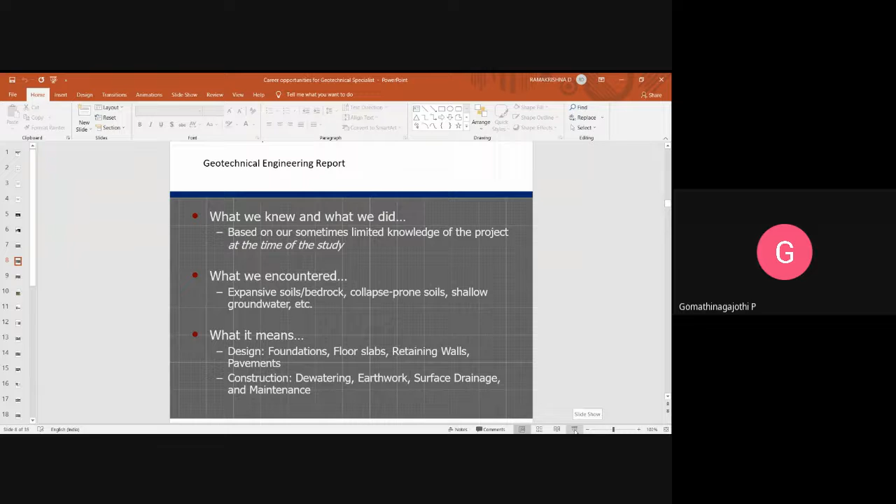Now some data we have collected. Sir, what does it mean? Ramakrishnan sir, sorry to interrupt — please tell me, ma'am, the first slide is still there. The slide is not moving. Yes sir, now it is moving. The full screen mode has some issues. Sir, you can keep two tabs open — one with the meet and the other with the PPT, so the screen is split and you can see other slides while presenting. Should I start from here? No sir, you can just show the slides so students can understand. Okay, and the explanations are very clear, sir. Okay, madam, okay.

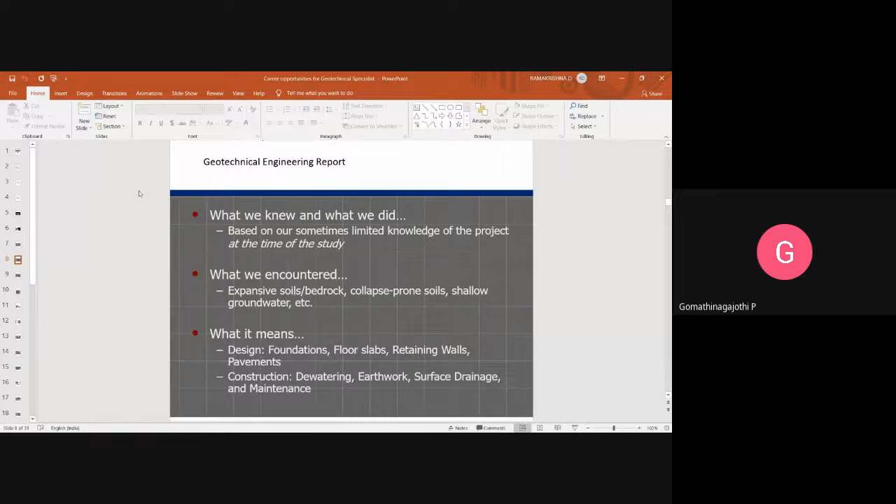Now it is visible, ma'am. So if I go to full screen mode now you can see. Yes, it is the same as before. So, you want me to... No, we can carry out like this only, sir. This only? It's fine, it's fine. Okay, okay.

So this slide we have seen. Now the slide is moving, ma'am, changing. Sir, it is in the second slide now. Yes, this we have already discussed. Third slide, this also we have discussed. Third slide is not visible, sir. Third slide is not visible, huh? Ah, yes, sir.

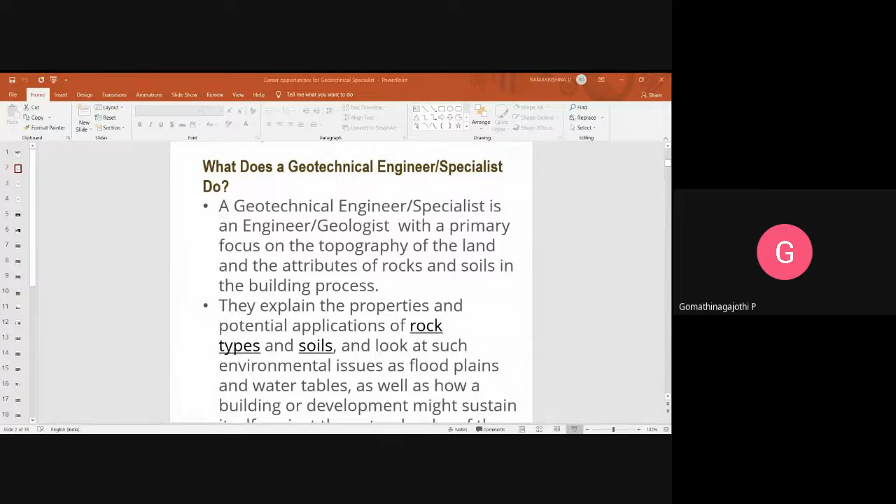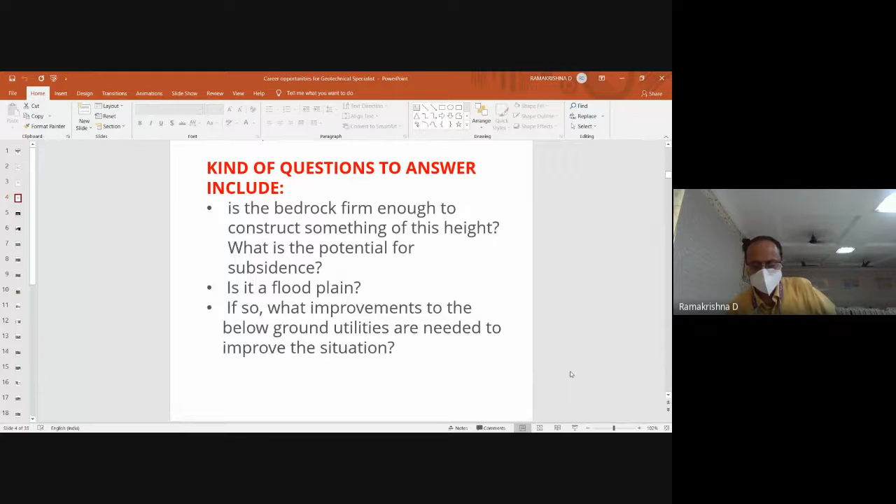Now, ma'am, it is in the fourth slide now. You can see the slide. Yes, sir, I can, you are able to see it. So that means if I go to slide view, you are not able to see? It's not moving at the time. Ah, yes, yes, sir. Maybe. Okay, then this should be fine. Yes, sir, I will show it like this one. Yes, sir, yes, sir. Please.

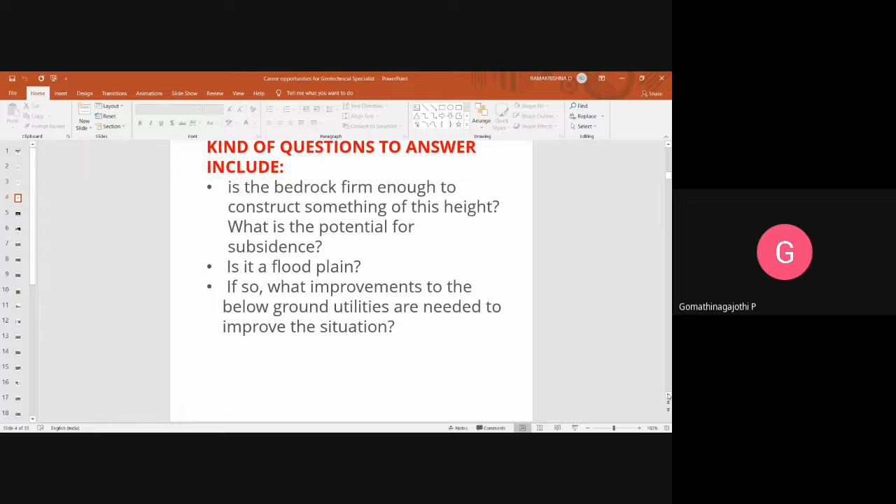So I just showed you this for your information. And these are the four components which are involved in any geotechnical study.

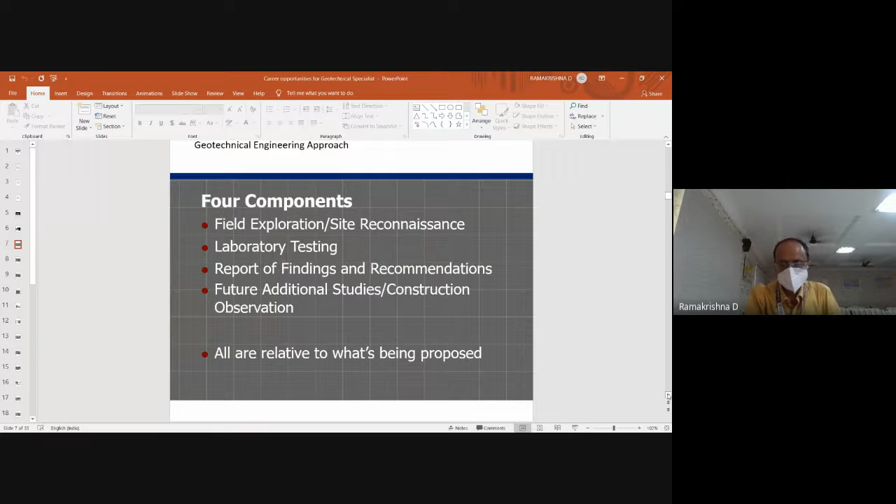So then I was telling you about how to tackle any problem. Once we understand what is the type of soil, what is the type of rock, whether the soil is prone to collapse, what is the depth of the water table - all these aspects - now, how to translate this to the designer. The designer is interested in foundations, floor slabs, retaining walls, pavements. So these are some of the requirements we specifically address as far as geotechnical engineering is concerned.

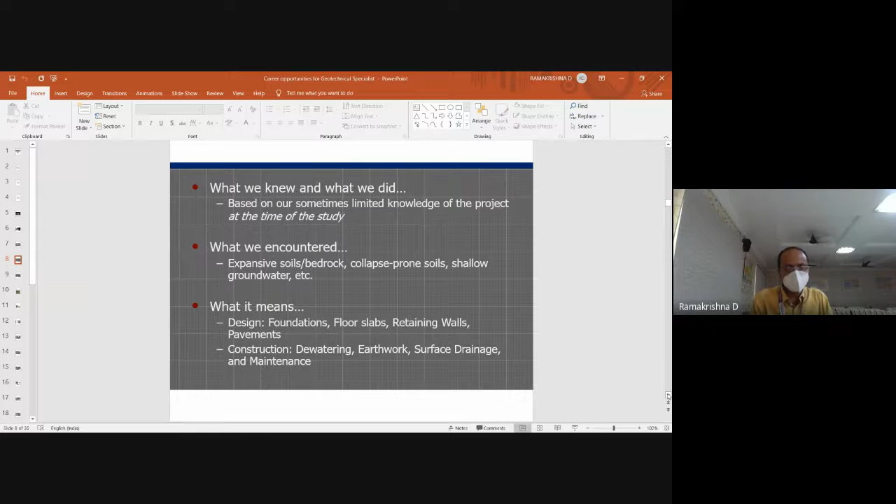Then coming to the construction persons, how our geotechnical knowledge is going to help the construction manager. What should be the extent of dewatering? What is the earthwork involved in carrying out this project? And what is the surface drainage conditions existing in the project area, and what is its implications on the project completion, and what are the maintenance tasks we have to do on a day-to-day basis when we are involved in construction.

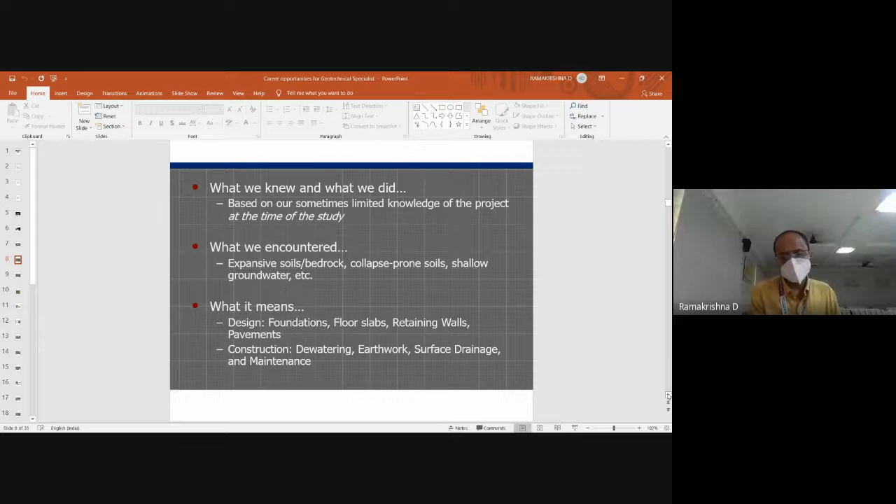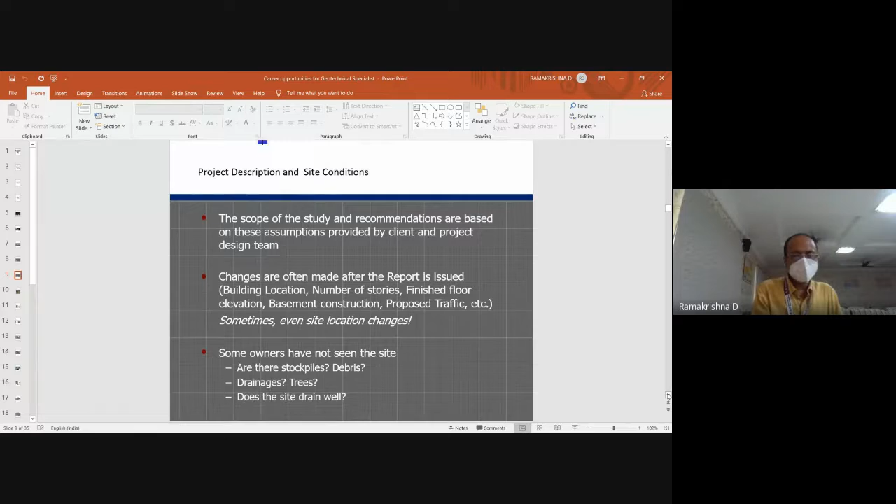Let us see how we go about this briefly. The project description and site conditions, scope of study, and any recommendations based on the assumptions provided by the client as well as the design team. Probably the DPR, the detailed project report, is normally provided to the project manager when he starts any project. So how much detail has he given on the geotechnical aspects in the DPR.

So the next aspect is what are the changes which are often made after the DPR is made. For example, the building location might have changed, number of stories, finished floor elevation, basement construction, proposed traffic, etc. Sometimes even the site location you may have to change. So initially if some site or part of a structure is proposed in a particular place, and due to site constraints, later on you decide it is not possible to complete the project with that same methodology, then you may have to make some change in the design itself.

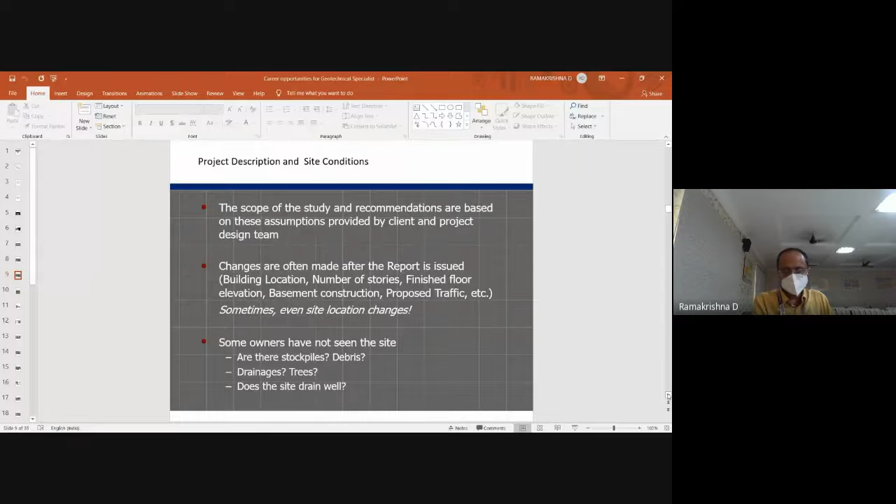Apart from that, some owners may not have seen the site itself. So some aspects are: are there any stockpiles, any debris, any trees, and does the site drain well? All these aspects have to be covered in the geotechnical report.

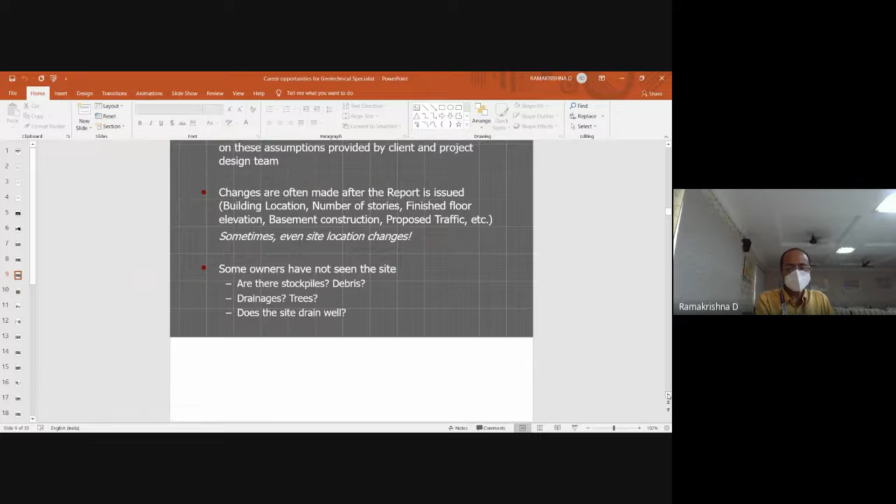Once you complete your desk study, you have to move to the field. You have to go and make a proper study.

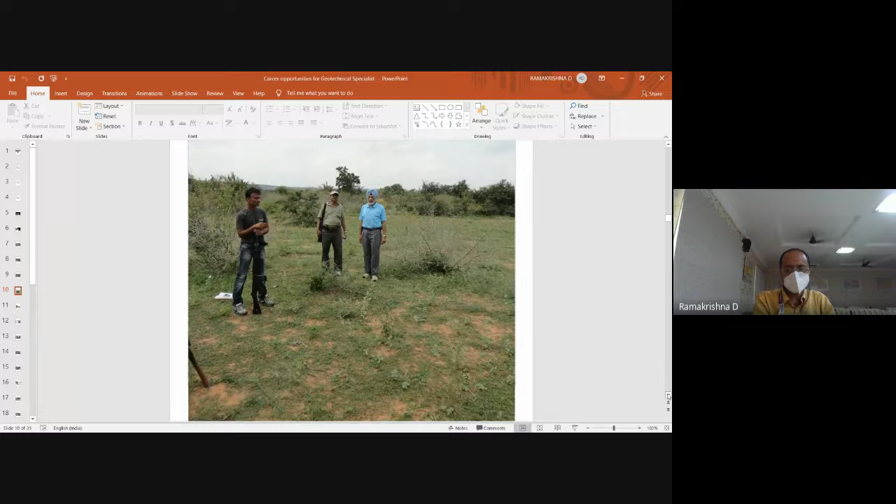I'm emphasizing all this because the job of a geotechnical engineer or geotechnical specialist is not simply desk work, especially when you are involved in project implementation.

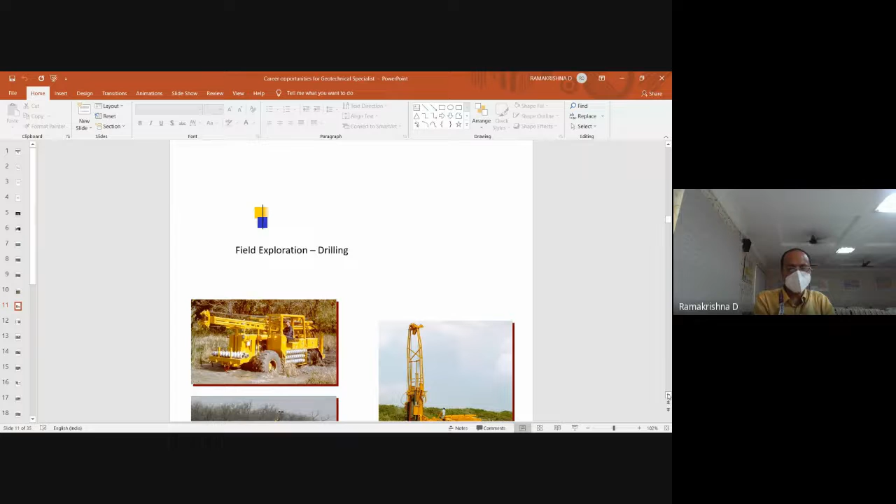After you do the initial reconnaissance, you have to do the field exploration. This may involve drilling, which is a specialized aspect in itself. So those of you who develop your expertise in site exploration - that itself can be a rewarding career for you, because there are multinational companies doing this field exploration, especially in the offshore and marine environment, and the salary also is quite handsome.

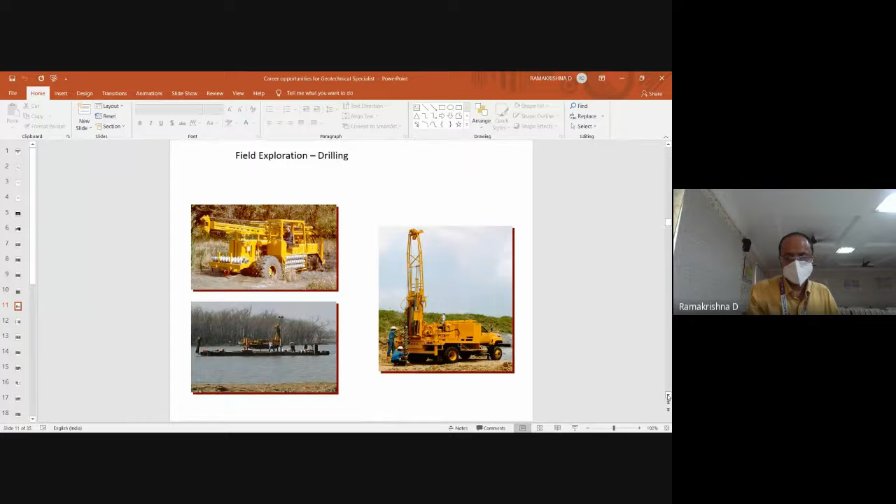So we can see the drilling operation for recovery of samples both in onshore as well as offshore, or in the marine environment.

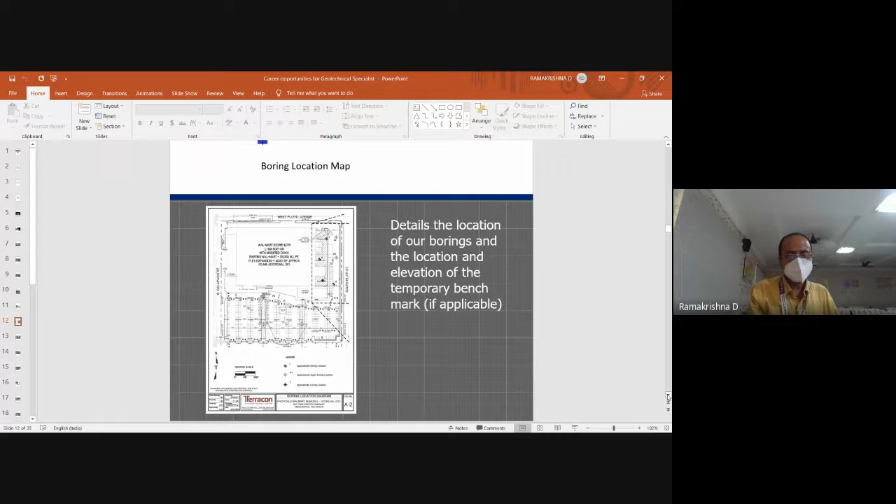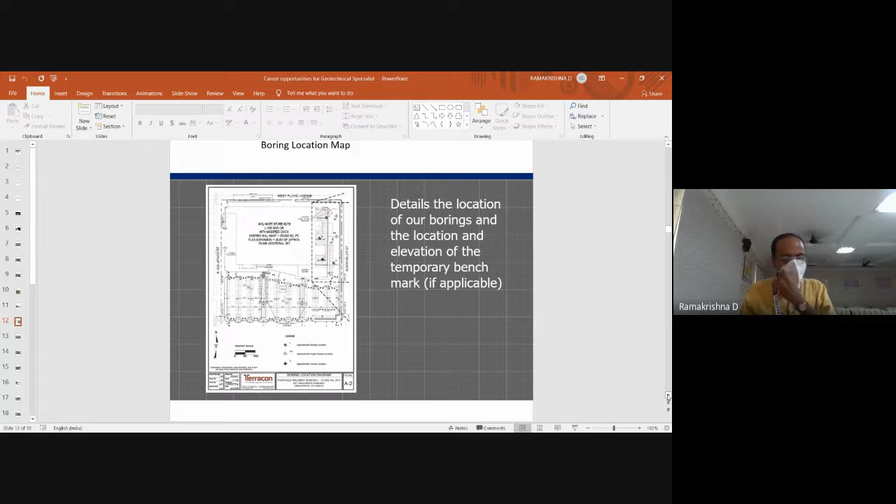Once you decide to start your exploration, you have to prepare a map. In that map you have to show your exploration program: how many boreholes you are planning to make, how many trial pits, what depth you want to carry out your drilling, and to what depth you want the samples to be recovered. This is going to vary depending upon the structure.

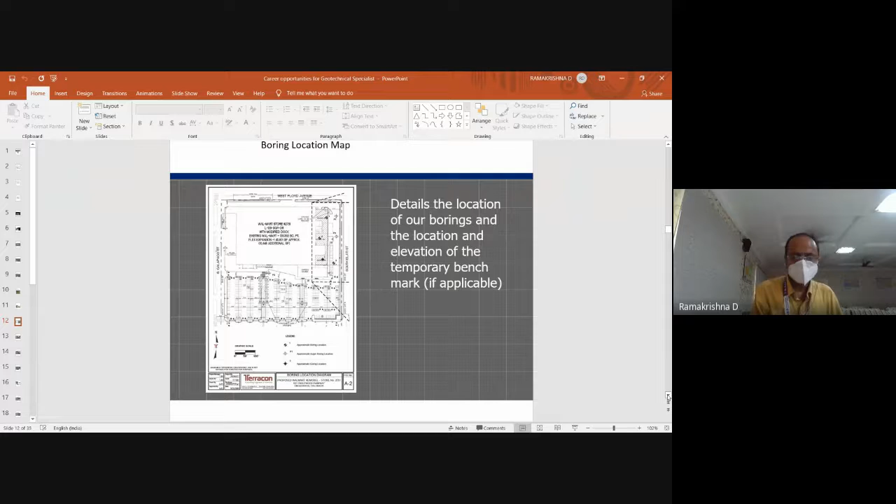We have already discussed this in detail in our soil mechanics and foundation engineering course, so I'm not going to repeat it. This sort of drawing you are supposed to prepare, precisely showing the locations of the boreholes. You should have both northing and easting carefully marked in the map. This drawing the engineer is supposed to prepare, either himself or through a consultant employed for it.

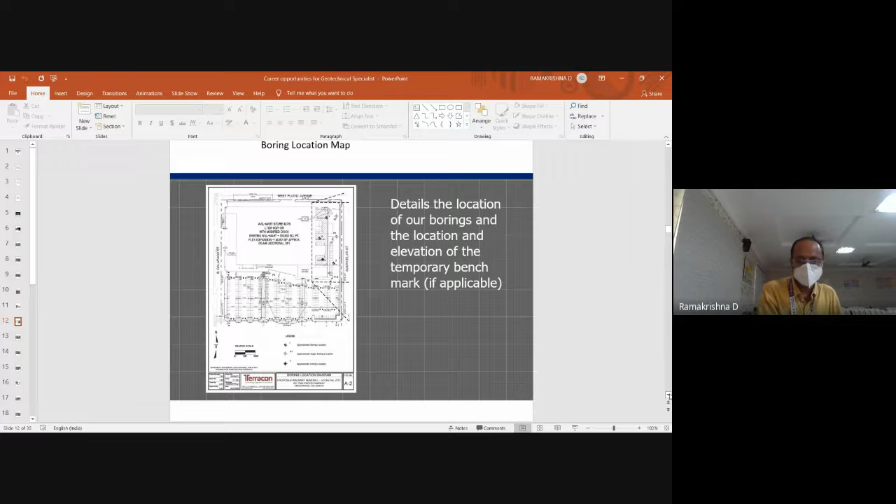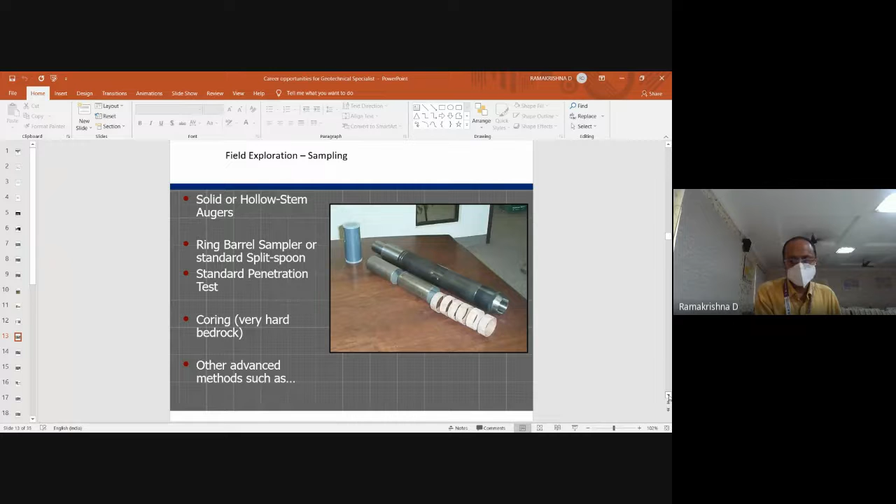Once you have the drawing, you can start your field exploration. There are various types of field sampling - it may be augering, or a split spoon sampler, it may involve standard penetration test, or in case of rock, you may have to do core drilling and take the sample. Apart from that, there are more advanced methods also.

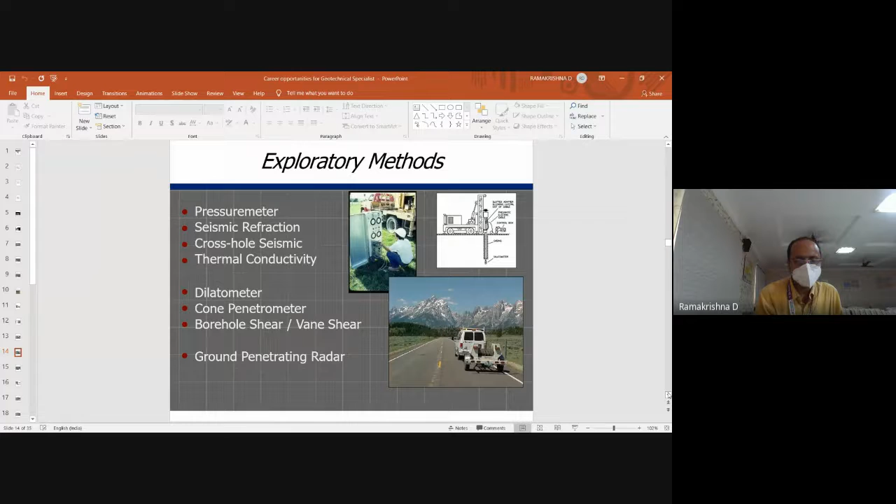The more advanced methods, briefly, I am just mentioning - only where it is required will you be doing it, not in all projects. It could be a pressure meter test, seismic refraction, or cross-hole seismic survey for mapping of the borehole or drill hole, thermal conductivity study, dilatometer test, cone penetrometer test, vane shear test, ground penetrating radar. These are all slightly advanced methods, used only where the requirement is there.

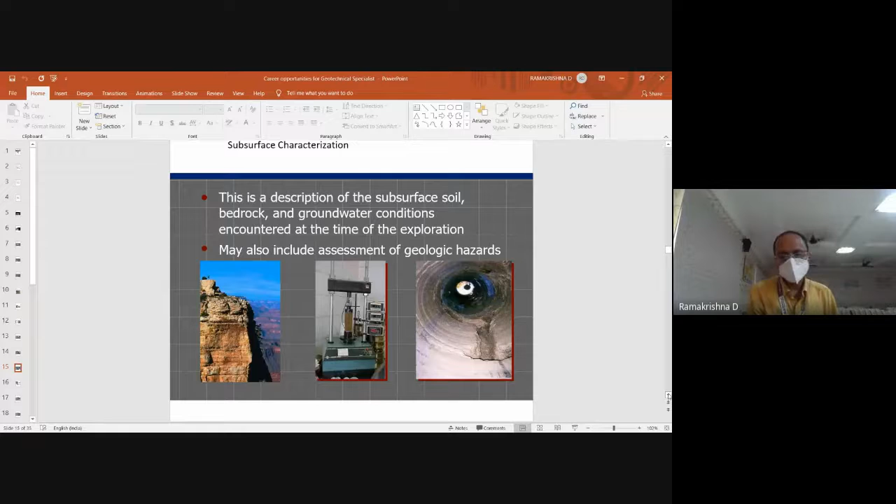Now we have done all this - so what do we want to do? We want to characterize the subsurface, that is our aim. This could be a description of the subsurface soil, bedrock, groundwater conditions encountered at the time of exploration, or may also include assessment of the geological hazards.

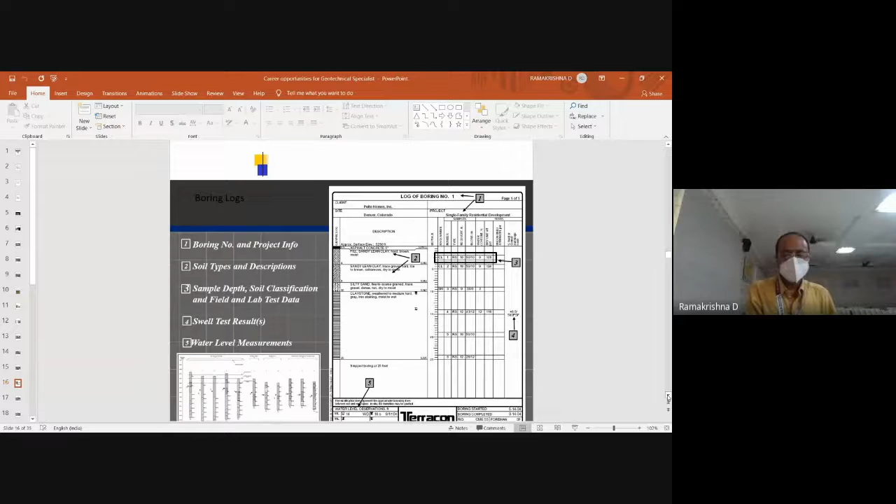Once you complete your boring program, you have to prepare a log like this - this is called a borehole log. This forms the record for the site exploration that you have done. The depth-wise data will all be recorded, with depth mentioned on the left-hand side. Supposing you have drilled to 30-meter depth, all the parameters encountered in the field will be recorded.

In addition, some of the samples may have to be sent to the soil lab for testing, for determining the index properties. That data also has to be incorporated in this geological log. Ultimately, it is this log which is going to be sent to the design engineer - this document itself is going to be self-contained.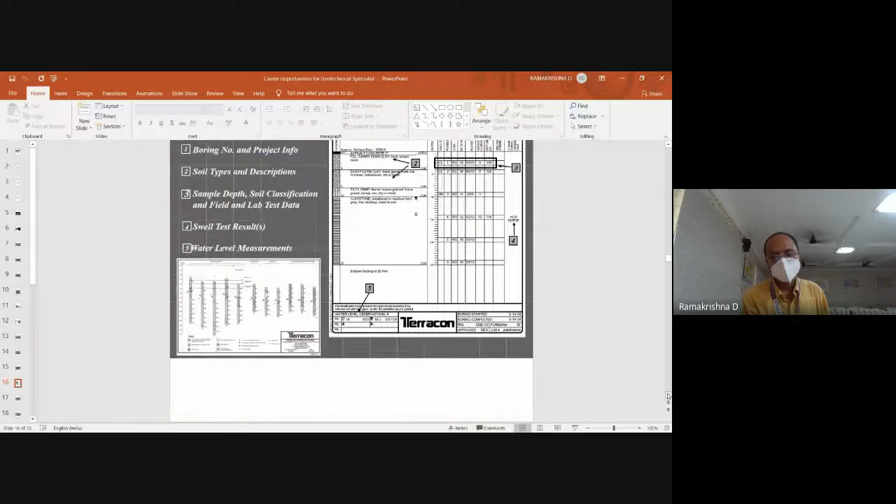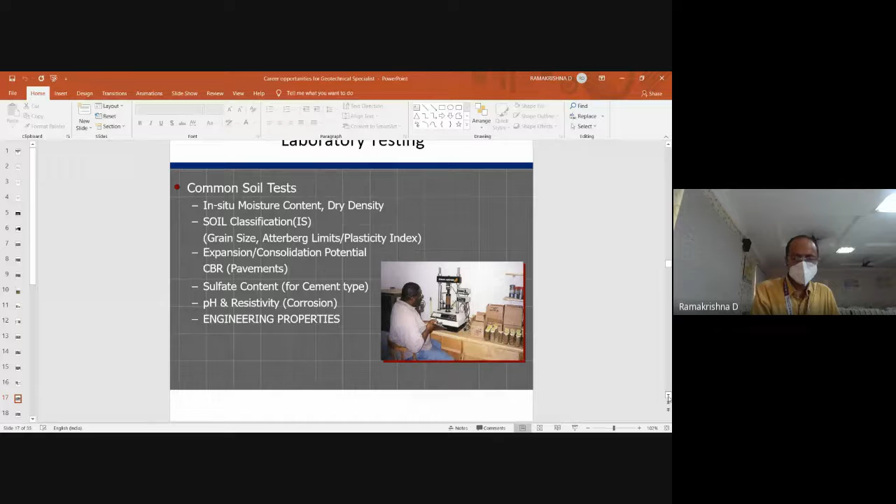Now, lab testing - what are the various lab tests? Most of you know this, we have discussed it in our lab course in soil mechanics. Some of the common soil tests include in-situ moisture content, dry density, soil classification as per Indian standards, expansion potential of the soil, consolidation, CBR value for pavement, sulfate content for cement, pH and resistivity, and engineering properties. All these properties have to be determined from the lab test.

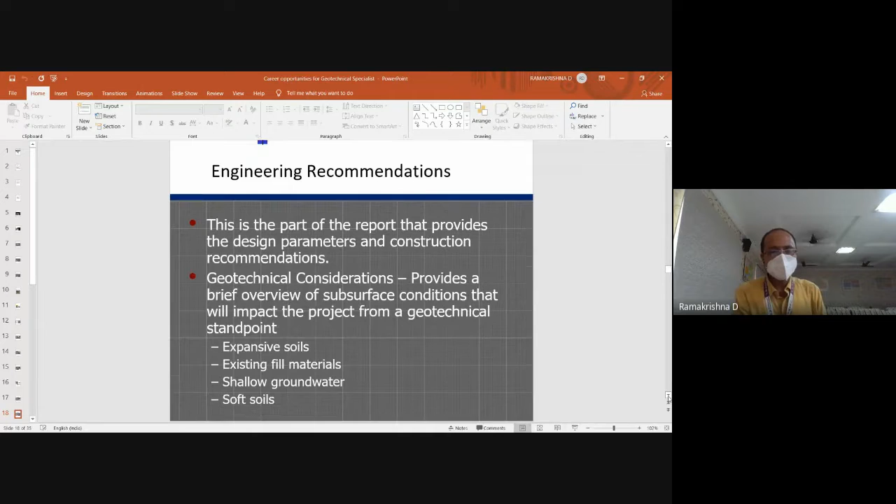Once you have all this data, you're going to make some recommendations to the design engineer. This is one of the very important components of the report that provides the design parameters and construction recommendations. The geotechnical considerations include an overview of the subsurface conditions that will impact the project, which may include expansive soils, existing fill materials, shallow groundwater, and soft soils.

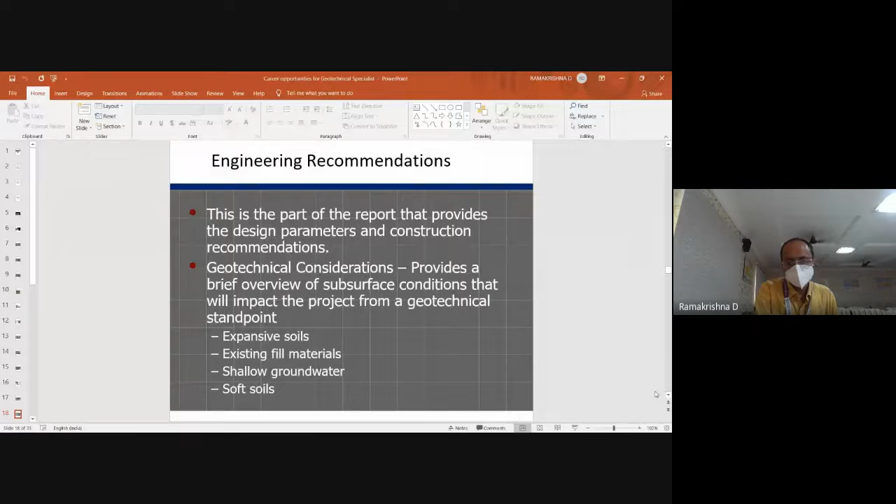Now coming to the foundation engineering aspects - I don't have to repeat this again. You know that for foundation design, the basic engineering property required is the shear strength of the soil, which should have been determined from the lab test, either by direct shear test or triaxial test. Or in some cases you may have to do the test in situ itself, depending on the geostrata - whether it is soil or rock. If it is rock, you may have to do the test at the site itself.

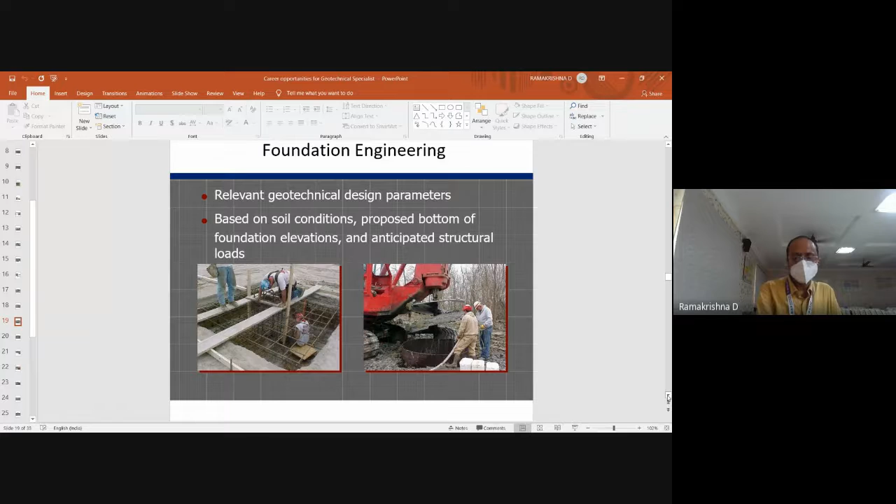So based on the conditions of the geomaterial, we are going to propose what should be the depth of the foundation, what is the settlement, and what could be the anticipated structural loads for safety of the foundation as well as the structure.

Now the other aspects involved in our foundation engineering may include drilled piers or helical piles. We also call the drilled piers caissons. These are used where heavy loads are involved, sometimes on expansive clays. They should resist axial loads, lateral loads, and uplift by socketing into bedrock, and the socket must be below the anticipated level of wetting.

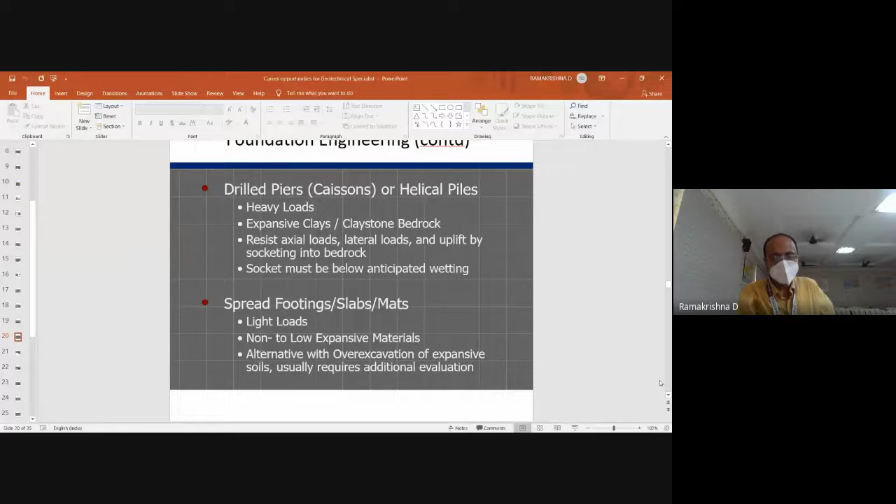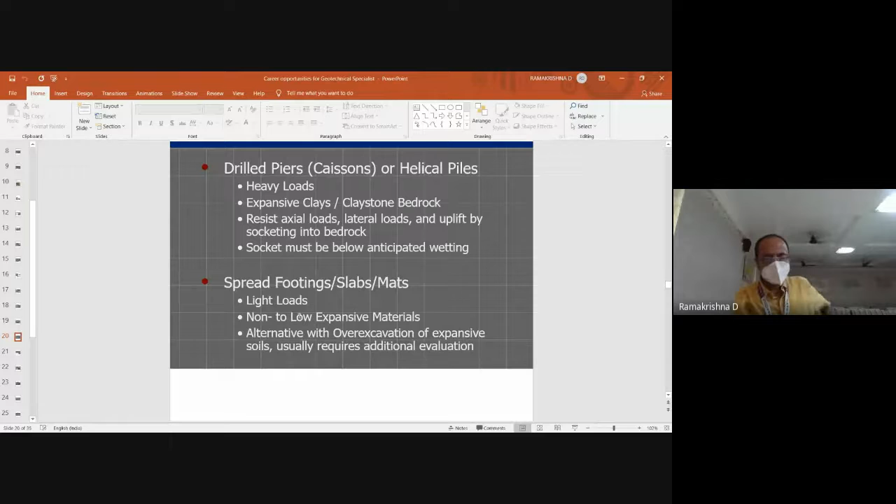Then you may also have spread footings, or a slab or mat, or a raft foundation. These are generally used where loads are light and materials are non- to low-expansive. An alternative with over-excavation of expansive soils usually requires additional evaluation.

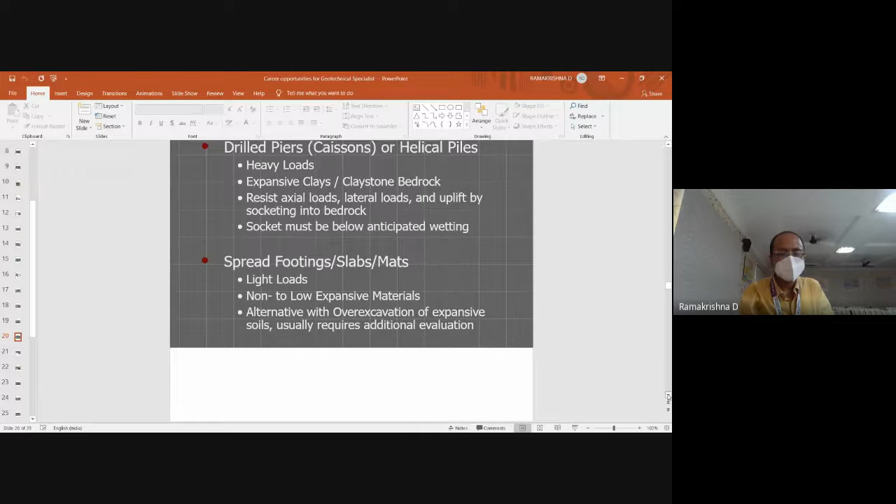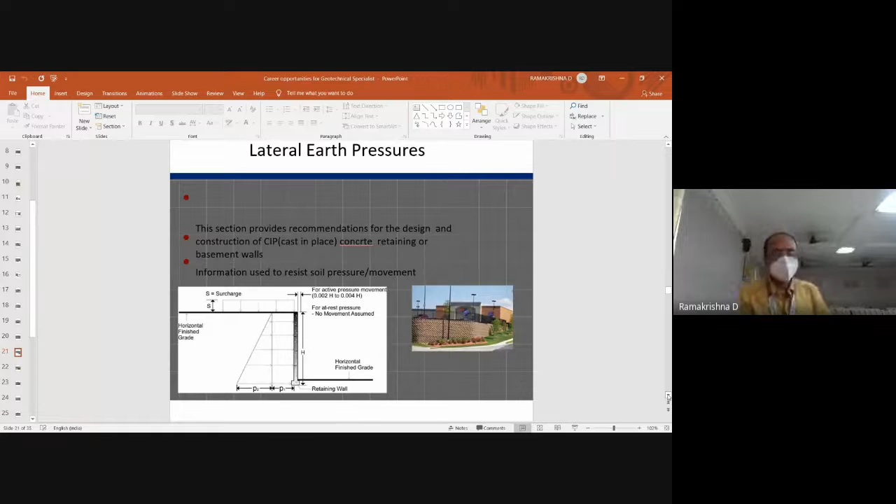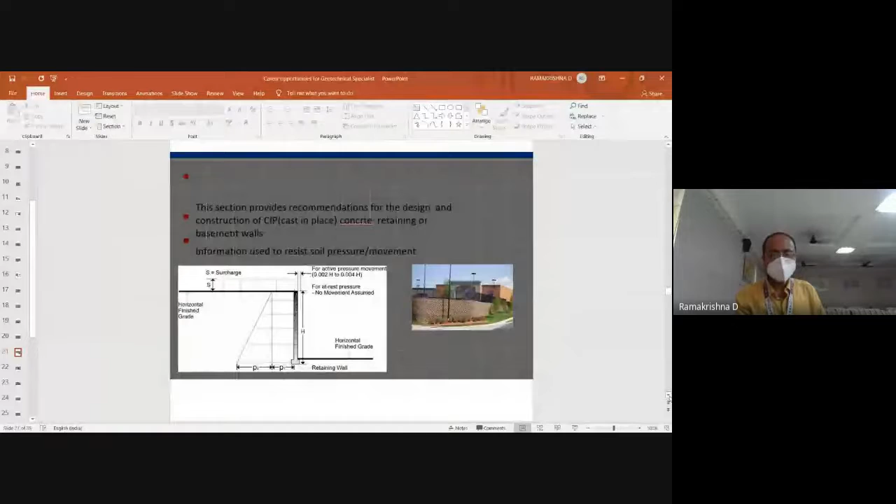The next problem the geotechnical engineer often deals with is lateral earth pressures, especially for retaining walls. For a retaining wall, the lateral earth pressure that will come on it should be determined by the geotechnical engineer. It could be a cast-in-place concrete retaining wall or a precast wall. Whatever the case, the input has to come from the geotechnical engineer on what the lateral earth pressure is and what the factor of safety should be.

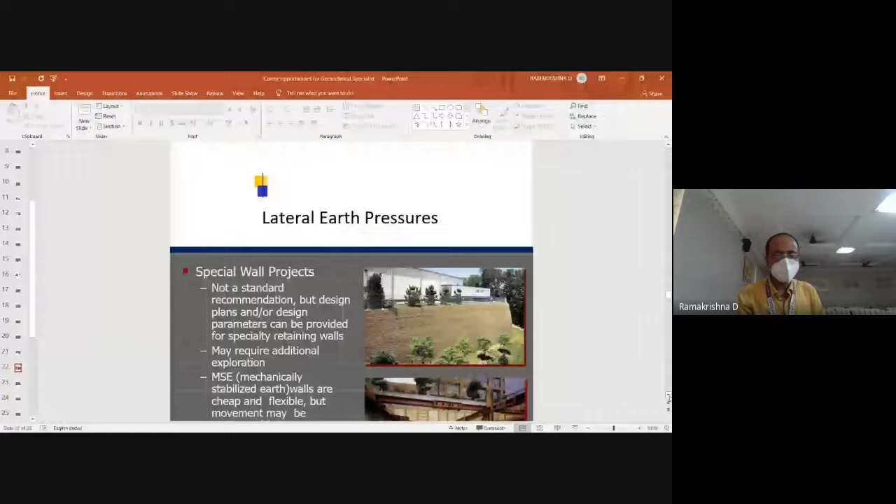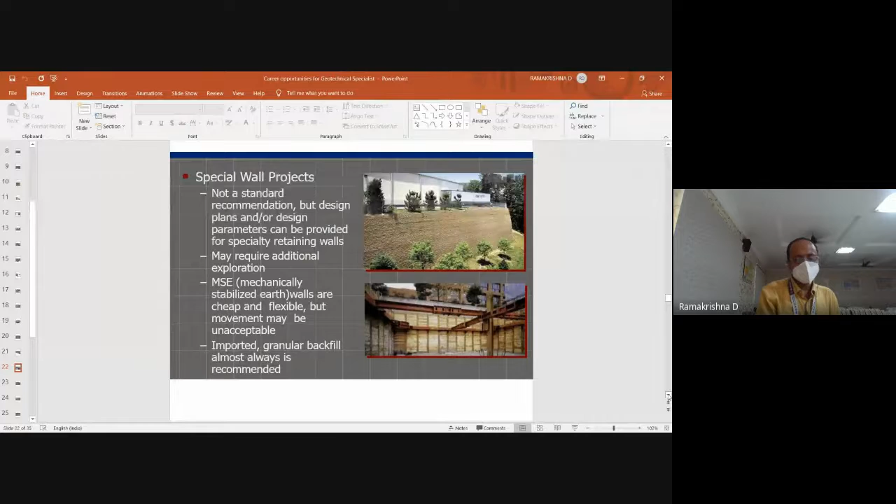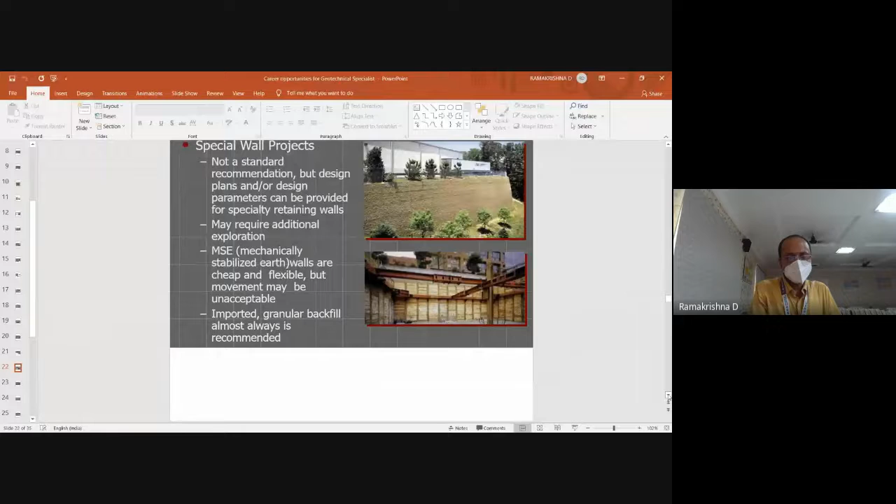You may also have special wall projects, such as a mechanically stabilized earth wall. There are various types of retaining walls, or it could even be a gabion wall, which is sometimes temporary. These retaining walls could be filled with granular backfill, and the backfill recommendation has to be provided.

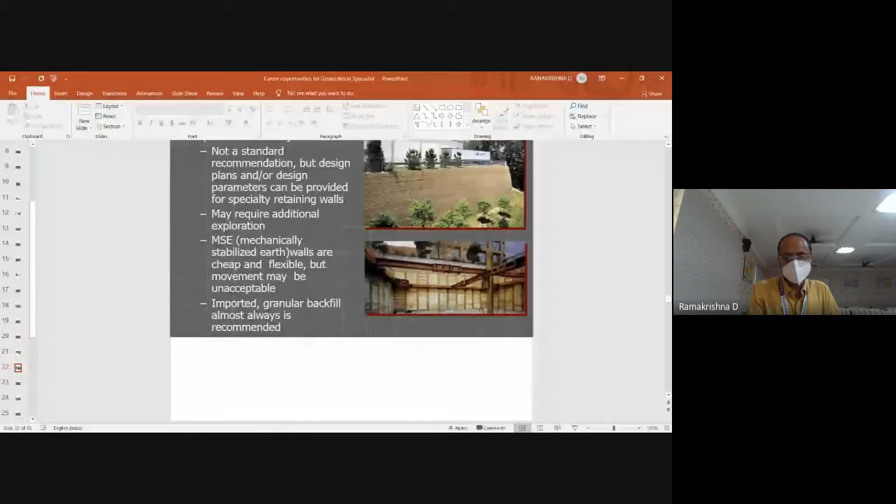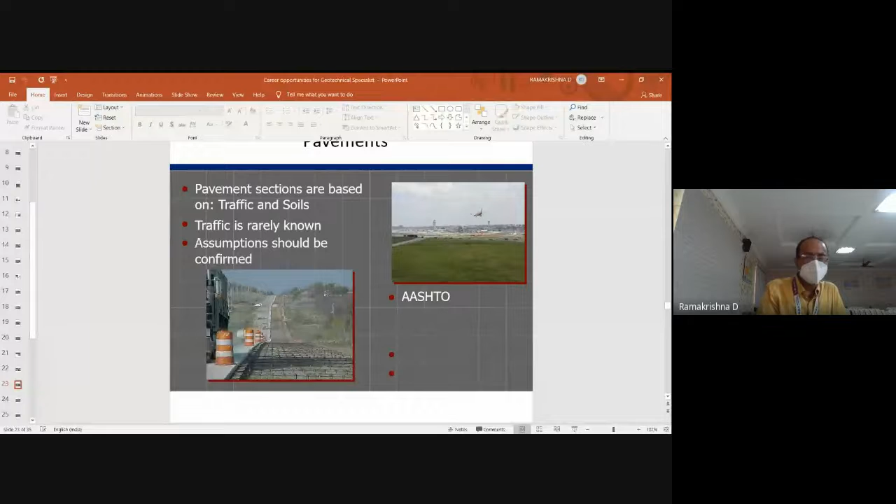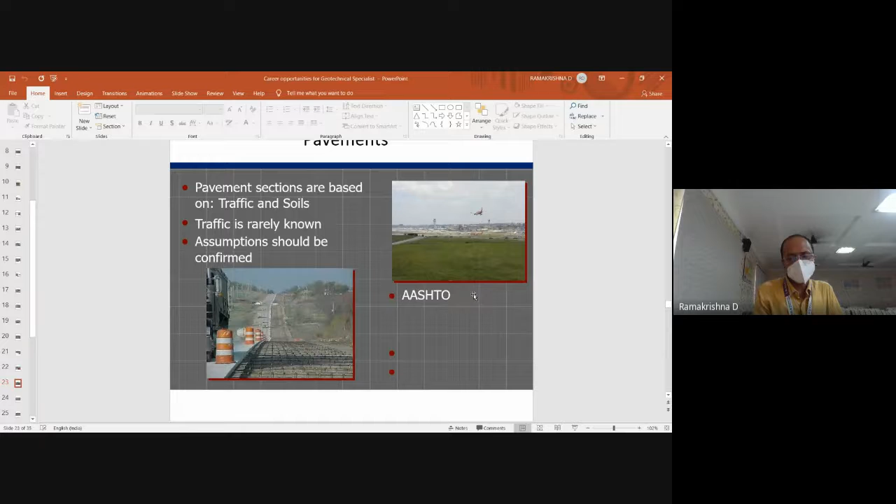The next aspect the geotechnical engineer deals with is pavements. Pavement sections are based on both traffic and soil conditions. Traffic is generally not known at the earlier stage, so assumptions have to be made and then confirmed later. For this, we generally make use of the AASHTO classification of soils, the American standard.

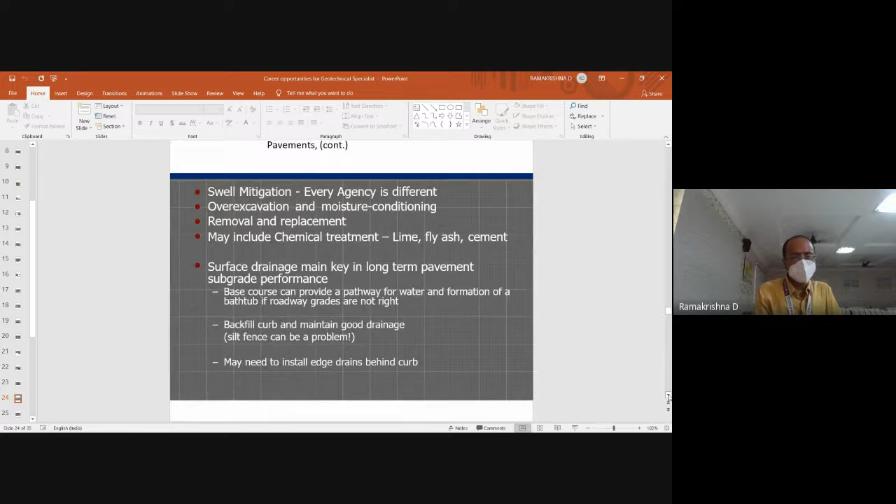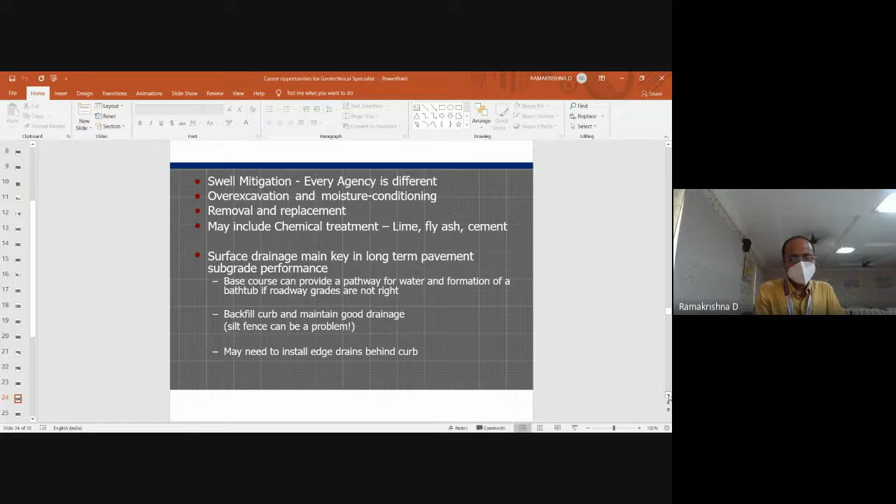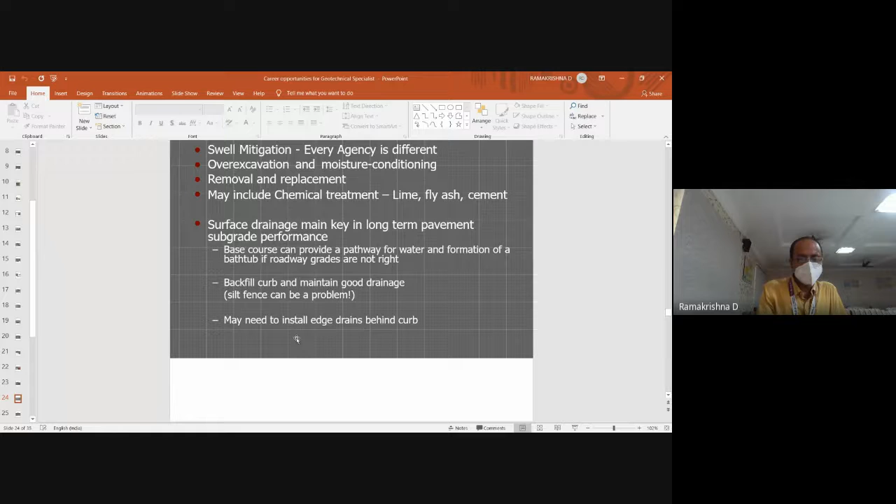As far as pavements are concerned, these are some of the aspects we have to study and deal with: swell mitigation, over-excavation, removal and replacement, and whether any treatment is required with lime, fly ash, or cement. Surface drainage also plays a major part in pavement design, as it may govern the pavement's performance. So we have to decide what type of drain to provide, and this also has to be dealt with in the report.

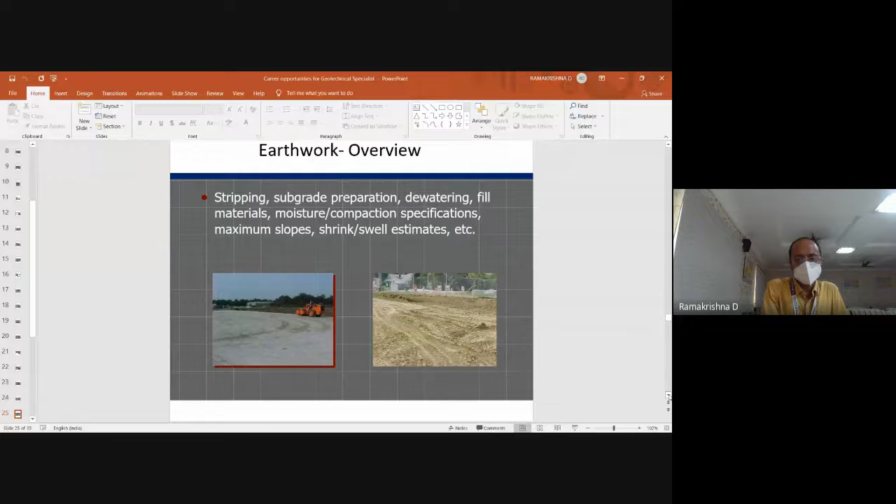Now the other aspect is the earthwork. This may involve stripping, subgrade preparation, dewatering, fill materials, moisture, compaction, and shrink and swell estimates. So if it is soil, that's what I've covered, but if it is rock, the problem is going to be much more difficult.

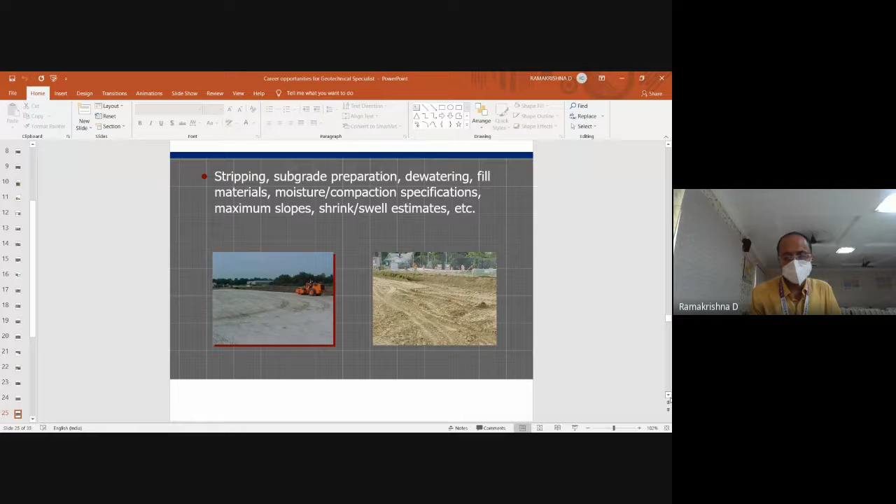You have to first decide what equipment to use for these operations. If it's surface work versus subsurface work, you may have to go for various excavation methods, depending on whether the area falls within municipal limits or in a forest area with no issue of blasting. It all depends on environmental factors.

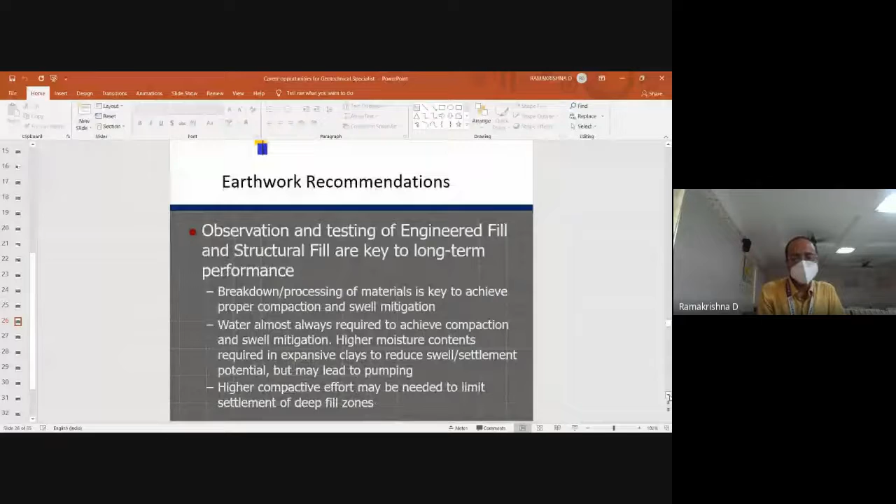For all these earthwork recommendations, you have to do observation and testing of the engineered fill and structural fill, both for long-term performance.

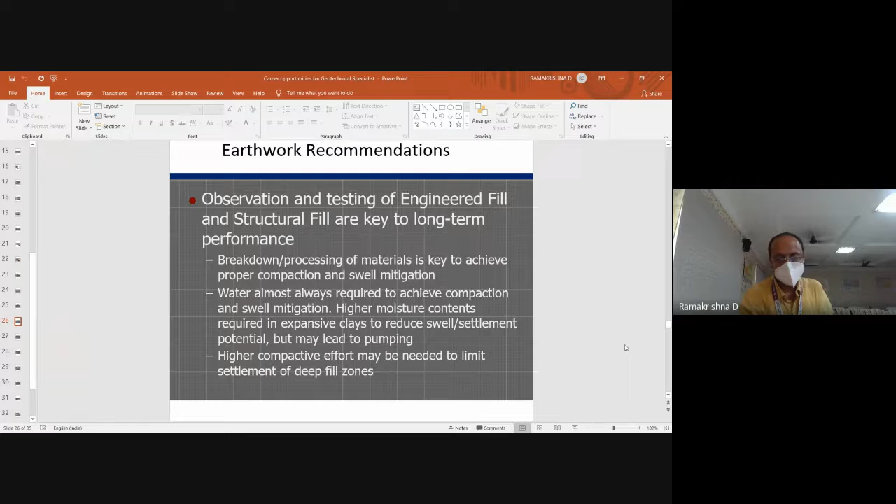The breakdown and processing of materials is key to achieving proper compaction and swell mitigation. Higher moisture contents are required in expansive clays to reduce swell and settlement, and higher compaction effort may be needed to limit settlement in the deeper fill zones. These are some more recommendations for earthwork, which I'm not really going to get into in detail.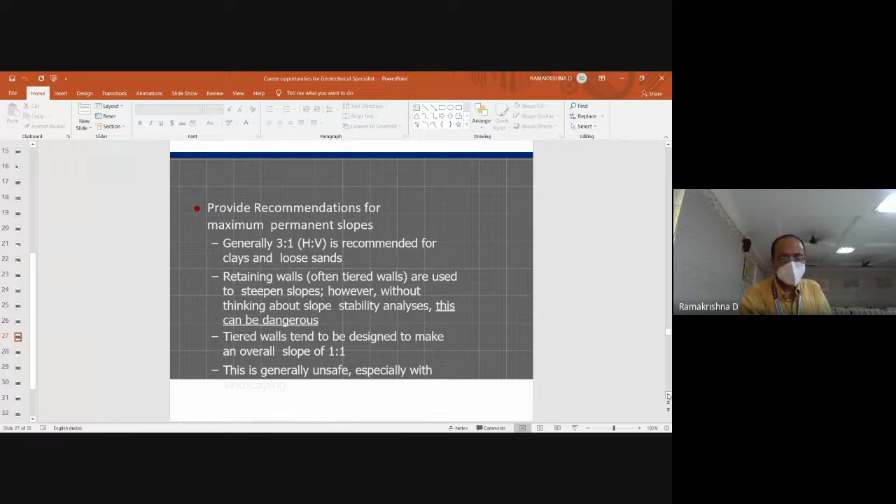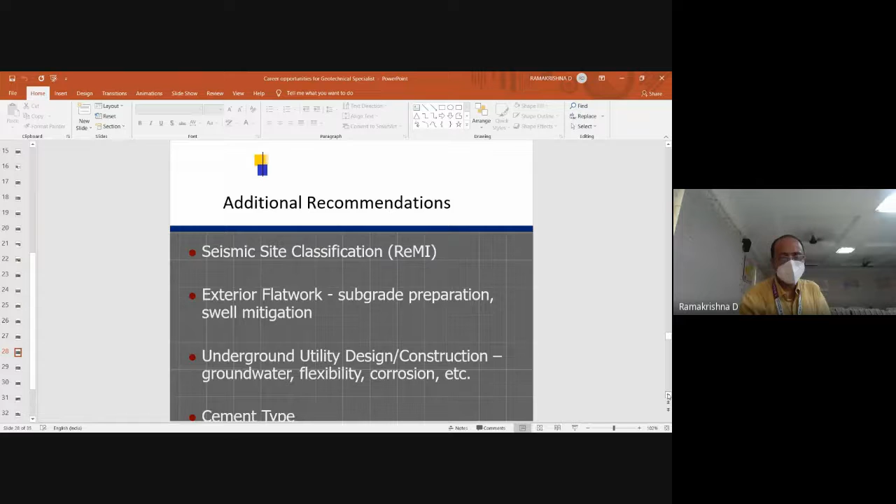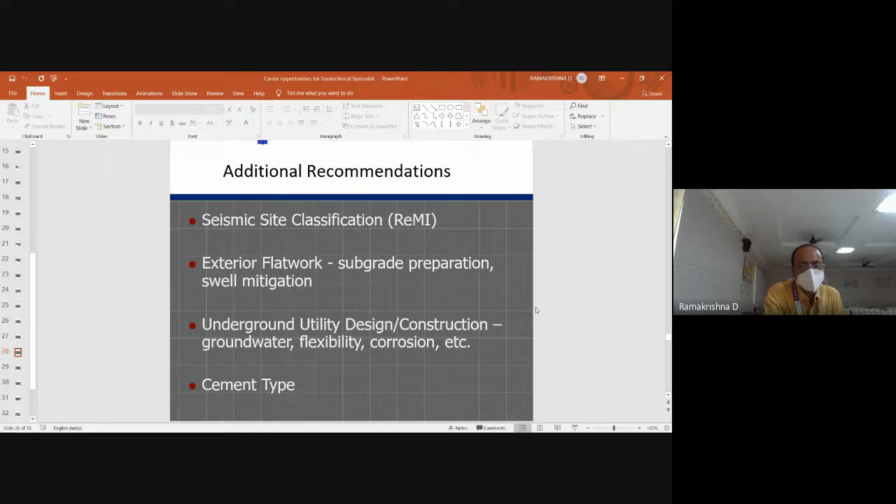Now, additional recommendations apart from what we have covered include seismic site classification. Then there's the underground utilities aspect covering design, construction, groundwater, flexibility, corrosion, cement type, as well as exterior flat work, subgrade preparation, and swell mitigation.

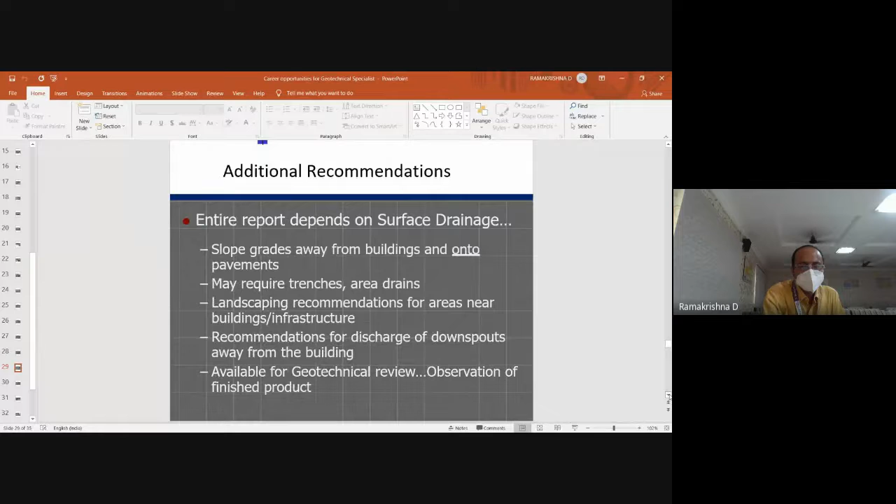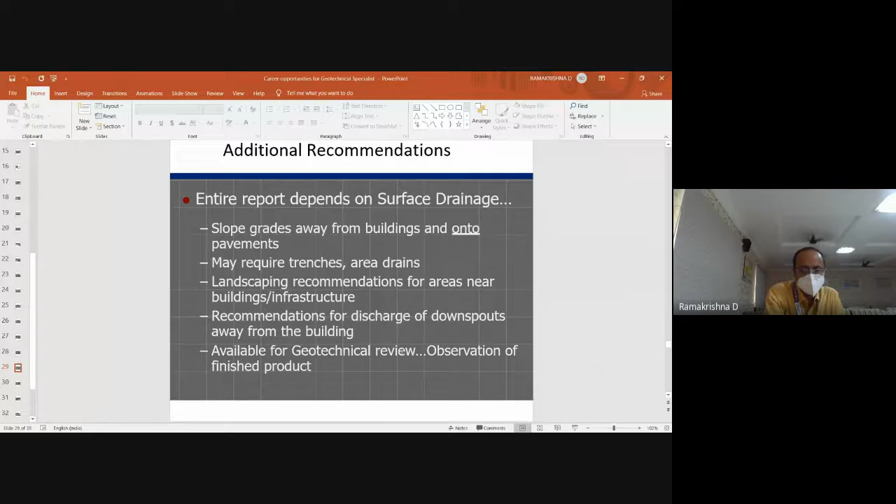So the report that you're going to prepare and submit to the design engineer or design team will obviously depend on surface drainage. Slope grades away from the buildings and onto the pavements may require trenches, area drains, and landscaping recommendations for areas near the buildings and infrastructure, along with recommendations for discharge from down spouts—essentially a drain pipe to channelize water away from the building to safeguard the structure. It should also allow availability for geotechnical review and observation of the finished product.

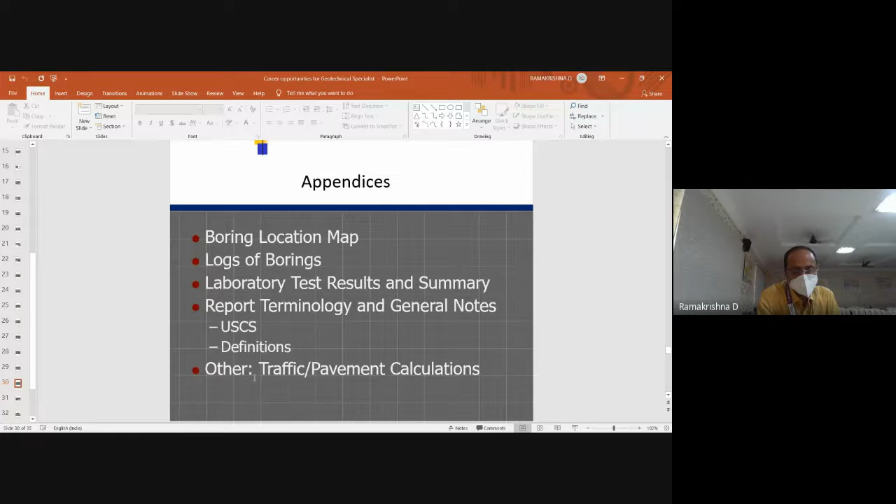At the end of the report, you are going to attach all this data: the boring location map, the logs of boring, laboratory test results and summary, the terminology used in the report, and other calculations for traffic as well as pavement.

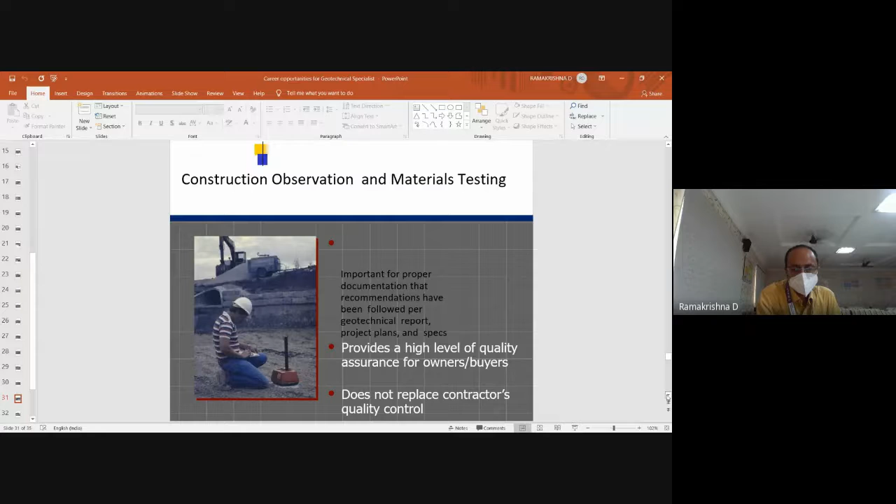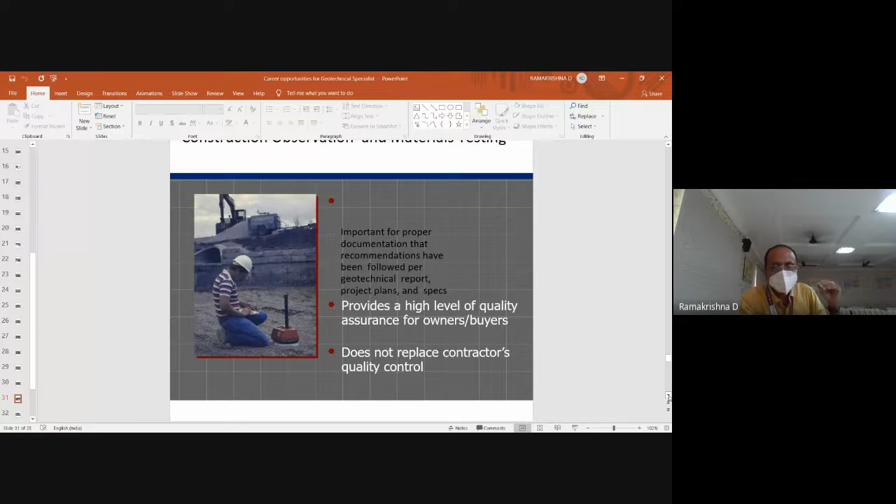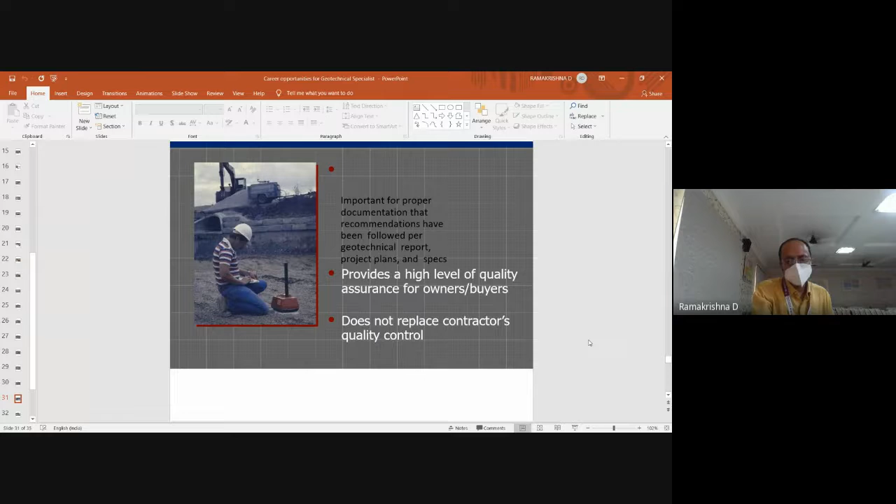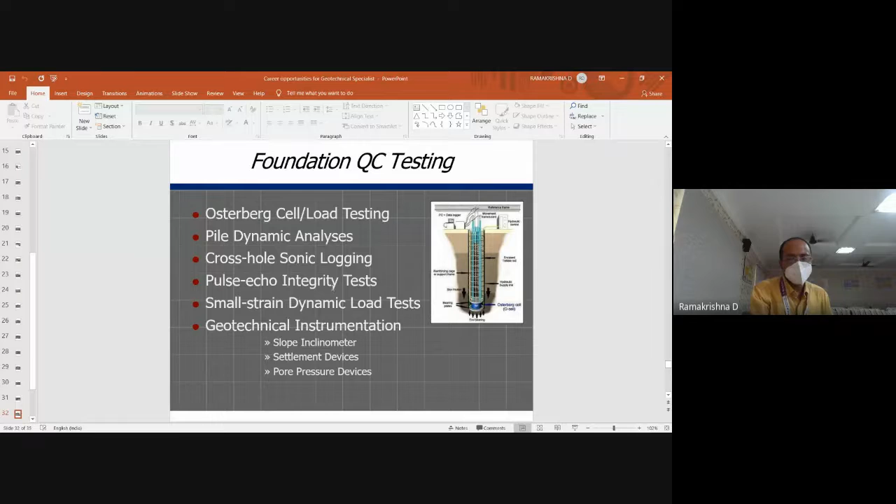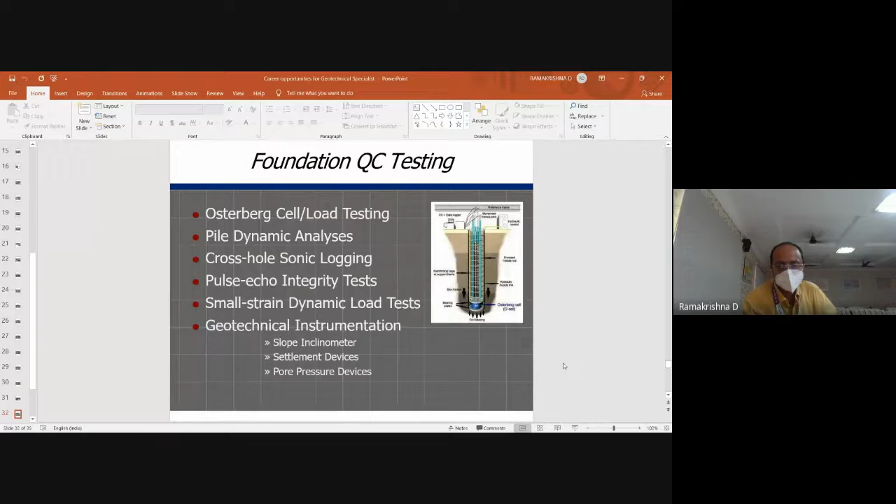Then comes the quality control testing of the foundation. There are various methods of doing testing. If you've gone for a pile foundation, you may do the pile dynamic analysis, then there are also other methods like the Osterberg load cell testing, sonic logging, and the dynamic load test. You can also have geotechnical instrumentation for monitoring the safety and serviceability of the structure, for which you may utilize an inclinometer, a settlement device, or a pore pressure device. This is not an exhaustive list—I have mentioned only some three equipment, definitely it is going to be much more than this.